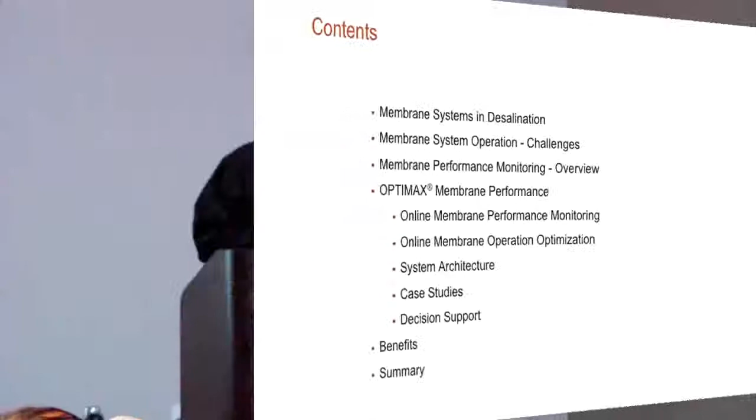The main purpose of this presentation is to talk about the major challenges that people face with ROs, which is the challenge of fouling. This reduces the productivity of the RO system in terms of throughput, increases energy consumption, and in some cases can even cause problems with product quality. So we're going to be reviewing a bit on that.

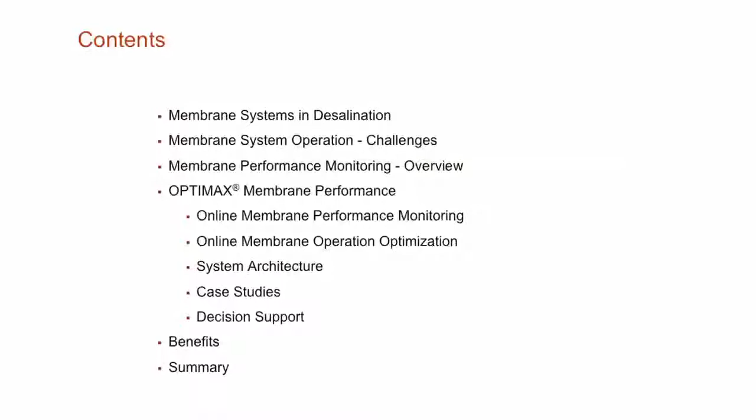Then I wanted to get into a technology developed by ABB called OPTIMAX, with the express purpose of enhancing membrane performance in an RO system, and also helping to reduce or conserve energy, since that's a very important part of RO operation. We'll talk a little bit about the system architecture, a couple case studies, and then get into the benefits and summary in RO plants.

We will be talking today about, within an RO plant, the different divisions of RO units, RO trains, and finally the pressure vessels and the actual membranes that are inside the pressure vessels. A little bit will also be said about pretreatment.

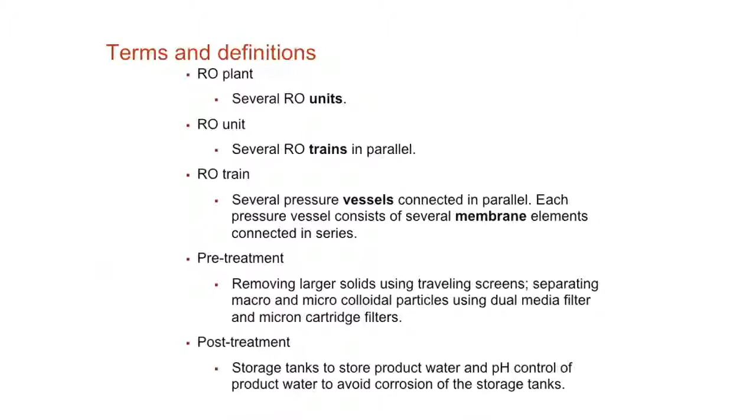Depending upon the source of the feed water to the RO system, this will have a great effect on what the pretreatment requirements are relative to things like suspended solids, organic removal, colloidal solids, and things of that nature. I'm not going to get into that a whole lot - I just wanted to recognize that most RO systems will have some form of pretreatment, and it can vary across the whole range.

Post-treatment - we're usually talking about this if it's for a drinking water supply that's going to be transmitted a great distance, like from an ocean inland many miles or kilometers. There's going to be some sort of storage devices right at the desalination system, then pumping stations, and there could be intermediate storage in between. You also need adjustments on pH, usually to make sure it's not aggressive on the materials of construction of the piping system, and it may be necessary to have some residual disinfection.

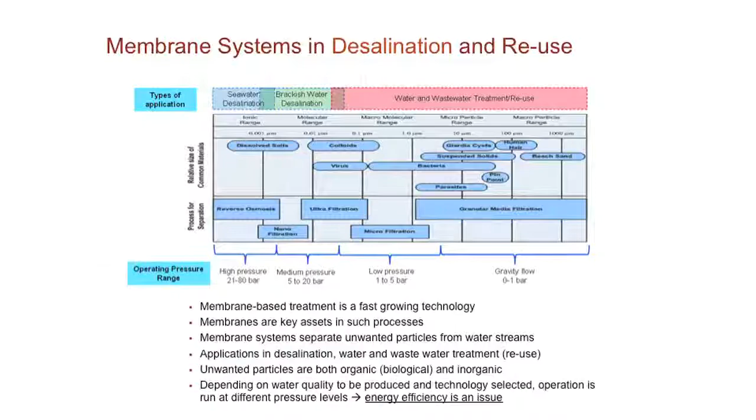RO, as you're all quite familiar with, ranges in the high pressure range as far as comparison to other types of membrane systems shown here. It also is in the range with the smallest allowed transfer size as far as molecular size. Many of these other membrane types are based on taking out suspended solids. By the time we get to nano and reverse osmosis, we're talking about taking out molecular-sized contaminants, particularly, in the case of desalination of seawater, predominantly sodium chloride.

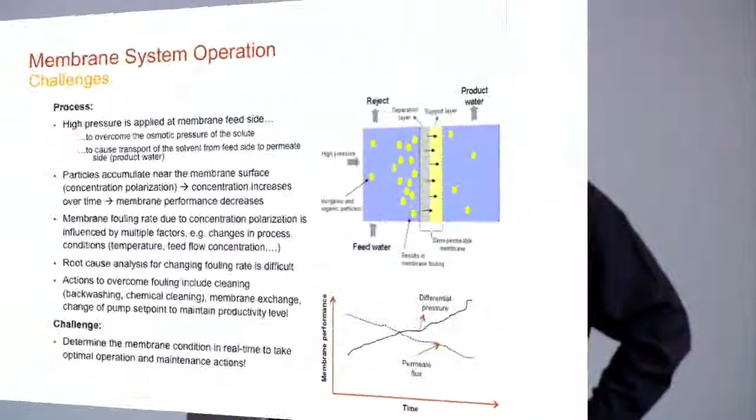To get into fouling - I realize this would be second nature to you, but I wanted to emphasize that fouling is created, for the most part, by the fact that we have a concentration, a localized concentration right here in a typical RO membrane. What we're depicting is an RO membrane in kind of a flat plate type arrangement, even though most of them are spiral wound nowadays.

Basically what we're identifying here is where the feed water comes in under high pressure. We have the semi-permeable membrane that will allow the water to pass through, while the larger molecules of dissolved salts and gases remain behind. We'd better not have any suspended solids at that point, or we'll be plugging up the RO regularly. The water passes through, and the concentration of salts and other things remains on this surface - that's where fouling occurs, as we get a localized concentration in the system.

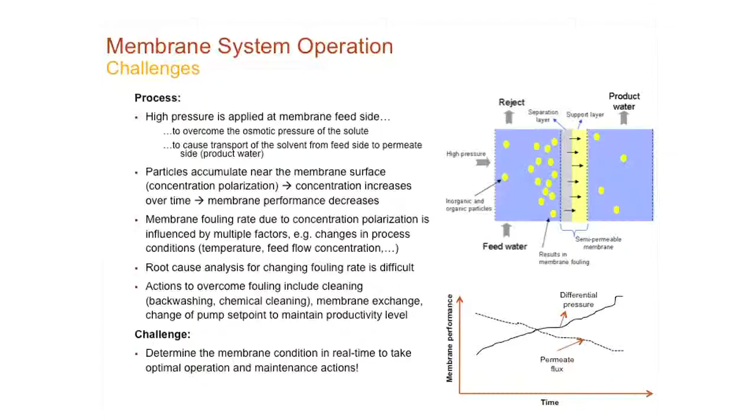With fouling, we have a couple different effects. One is that over time, our differential pressure between feed pressure and permeate or product water pressure has to increase in order to maintain the same amount of product production, or conversely, we'll see a decline in the permeate or product water production. Both of those are negatives, things we wanted to avoid because they overall cost us money in the operation of the RO system.

One phenomenon that we've noted, and this is not just ABB but the whole industry that uses it, is that fouling can actually occur in stepwise formations. This may be due to the fact that all of a sudden a bigger glob of stuff shows up at that localized concentration site, and as you can see, it can actually then sometimes drop off because it might flush itself out naturally, or through cleaning. Whereas the fouling thickness is more of a gradual upward lineal type approach.

Now, as far as restoring the membrane's performance, that's been done for many years, and there's been a lot of input made on that from the manufacturers of the membranes themselves, who are constantly trying to make improvements to ensure optimum performance. RO has really come a long way in the last 10, 20 years and has replaced a lot of other types of technologies, particularly thermal technologies in desalination.

The rule of thumb you'll get from OEMs of membrane systems is that they'll indicate how frequently the RO membrane should be cleaned by back flushing it, and you can do that a number of times. That's less aggressive than trying to do a chemical clean, and they'll give you rules of thumb for chemical clean too. A more scientific approach is to take a look at the ASTM standard on it, which pulls in more science relative to some of the conditions of the membrane and the water.

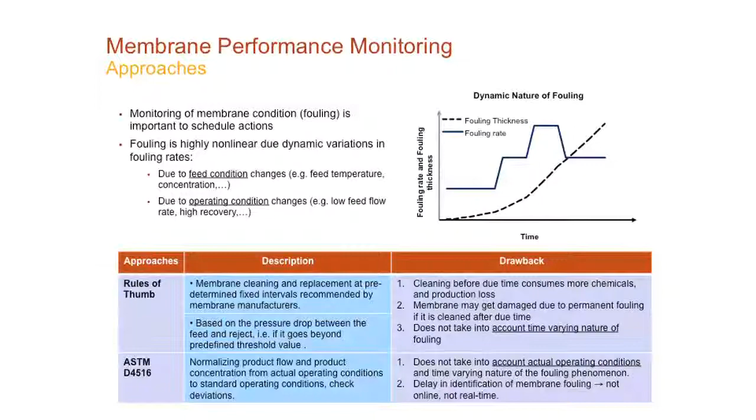So the system we're going to talk about today has a more dynamic review on it. It isn't instantaneous, but more on an hourly basis, or after an hour or two. Compared to these rules of thumb, which are basically just taking a look at how the production is doing over days, weeks, months, and eventually saying, okay, our membrane manufacturer recommends we ought to do a backflush on it, we better do a backflush on it.

I've already mentioned how to restore the membrane. One of the approaches is flushing, where we're basically backflushing the membrane. I should have mentioned at the very beginning, in any RO system it's standard practice to always have one more train than is needed. If you want 5 trains to handle the production that's necessary, you would actually install 6, so that when we take one out of service, we've still got the others to give us full capacity.

So with flushing, we are going to take the train out of service and backflush it, and that cleans out a certain amount of the fouling. I'll show you a chart in just a moment as to how well that can restore it.

Chemical cleaning, our definition of that is that you're going to be running a cleaning solution through — what we call clean in place — where a cleaning solution is run through the membranes and helps dissolve some of the localized fouling. If it's some of the dissolved salts that have maybe crystallized out there, it'll dissolve the ones that are still soluble and then flush them out, giving a better restoration than flushing.

Partial replacement refers to times when it's determined that one pressure vessel out of a whole array of RO pressure vessels is the one that's really producing bad water all the time, actually creating problems with the product quality. It's possible you have to take the whole train out to get to it, but it's also possible to just replace all of the membrane cartridges in that one pressure vessel and significantly restore the product quality.

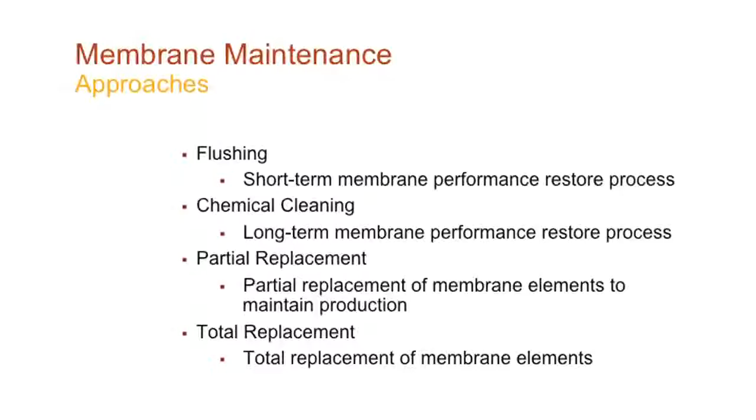Total replacement is going to have to occur on any RO system eventually. I've asked a lot of the RO manufacturers that make the membranes what sort of life expectancy we might have. Some of them do give guarantees, but those guarantees tend to be on the conservative side because they don't want to be paying a lot of money out of pocket, and they're not operating the system, so they don't have control over it. Some will have guarantees of 2 to 3 years, but typical life expectancy on spiral wound RO membranes is between 3 and 6 years, and it has a lot to do with how they're operated, what's going through it, and how frequently the cleaning is done.

Within an RO plant, we have different levels: RO units, and units are made up of trains. Trains are made up of individual modules that have the membrane stacked inside of them, and those are pressure modules, pressure vessels. The OPTIMAX program basically has two components to it.

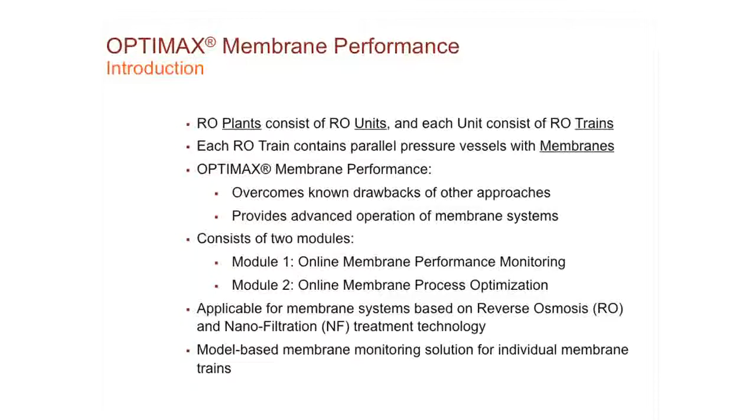One is a monitoring approach, and then it takes the data from that monitoring, runs it through some algorithms, and presents optimization recommendations. It doesn't actually physically have control over your RO system to make changes, but it puts itself on a dashboard for the operator to look at and say, okay, this is what it's really telling me. Beyond the rule of thumb that I had to do a backwash every 3 months, this thing's telling me I could wait another month or two because the condition is not that bad. So that's what we'll be talking about today.

There are a couple key points relative to performance monitoring that I've tried to underline. One is that this software will be available to work on different membrane configurations. It's not just one individual manufacturer or one specific type of membrane configuration, which I think is important because there's a very broad field of RO membranes. There's no additional sensors needed—we're basically taking data off of the assumption that the RO system is fairly well instrumented to begin with. So there's not a lot of hardware investment.

The other items I wanted to identify on the benefit side are the ability to identify the due date for the next membrane cleaning and backwash—I think those are really key features, because that should help extend the life of the membrane and reduce the amount of operation and maintenance costs for the people in your facility. Further, information comes out of the algorithms that helps tune the model to try to optimize and get the membrane operating at its peak performance.

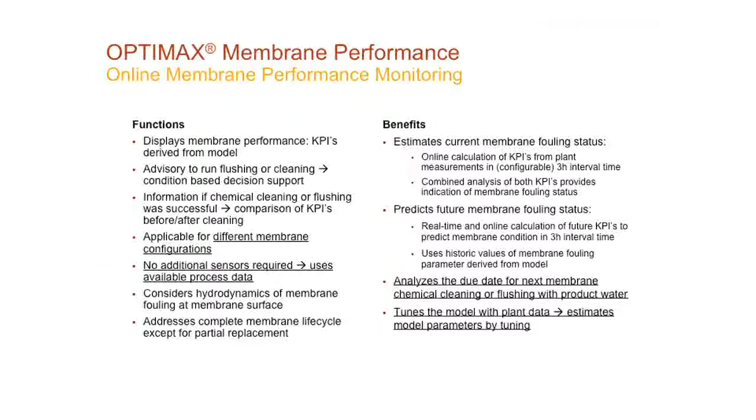One thing I should mention—the question might be, well, would you just go sit in a closet someplace and do a whole bunch of calculations and come up with this information? The answer is no. We've got very highly skilled engineers who did the calculations and then took it to pilot units initially to determine whether their calculations were valid, made some modifications, and then had the opportunity to beta test it on full-size operating customer units. One great thing is on a system that has multiple units, you can pick a couple of the trains and operate on those without affecting the whole system or having to take the whole system out of operation.

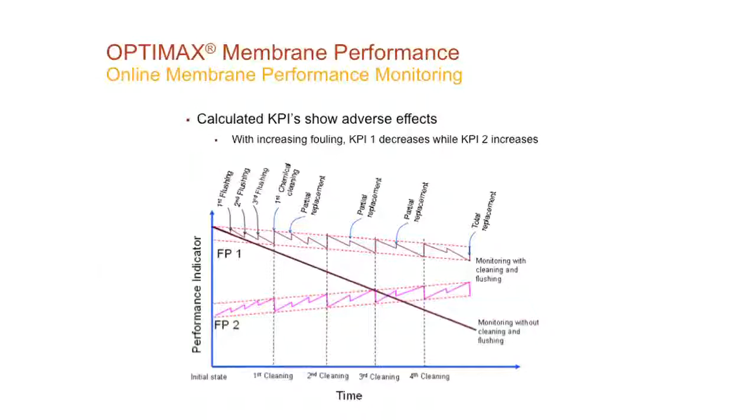Now, if we add cleaning and backwashing—first off we're going to do the backwashing, the flushing—because it's less intrusive, less aggressive, we're able to restore from this point back up to this point on each one of these, some of the performance of the membrane. But as you can see, the performance doesn't go straight across anymore, it doesn't maintain like it was new right out of the package. There will be some degradation, and that's normal too. But look at the difference between the line up here and this line down here. So it's really important to know that cleaning and flushing on a regular basis are very, very important.

Now, another KPI could be the energy consumption, represented by this line. As the membrane degrades some, the energy is going to go up a little bit. Then you flush it, and it performs better, comes back down a little ways, and so forth. But the overall trend is going to be up. What we're trying to do with our program is reduce these slopes so that the overall downtrend is not quite as steep, and the overall uptrend on something like energy is not quite as steep. We've been able to prove that OPTIMAX can do that.

This is typical of some of the dashboards. There's all sorts of different dashboards that can be presented for the customer depending upon what their specific requests are.

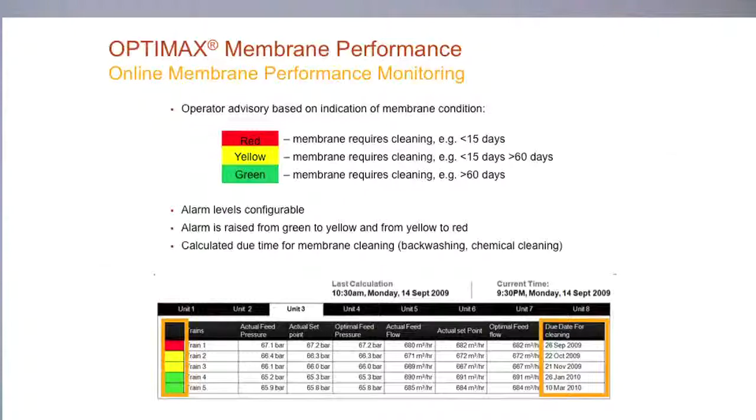In ROs, with this program, we can come down and real quickly see that we've got one train here that's going to be requiring some cleaning, and this is approximately the due date we ought to be looking at, plus or minus a day or two. But by rule of thumb, it may have told us to clean two months before this time—we would have been really wasting some capacity at that point. And under other rules of thumb, we might have missed this cleaning period based on the actual performance of the RO system. If you miss it significantly, it can get to the point where you can't restore it adequately at all, and then it has to be a membrane replacement, which adds to the cost.

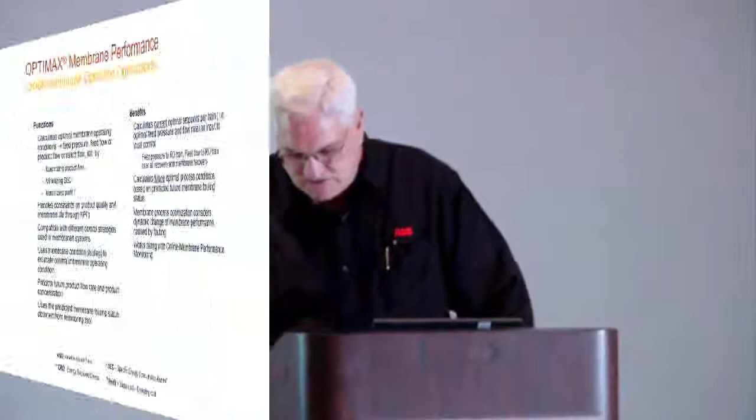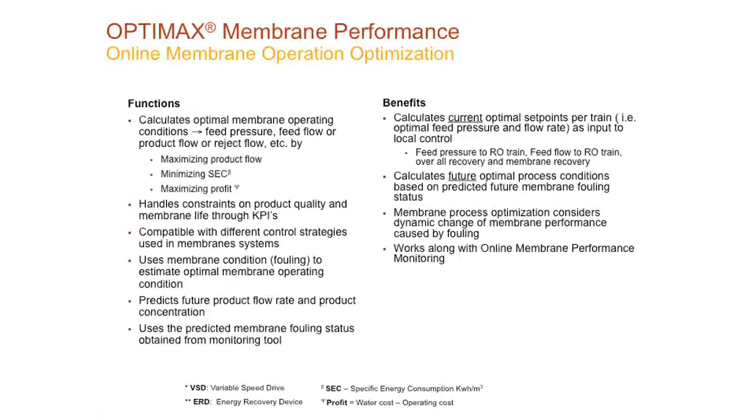The key thing here I wanted to bring your attention to is that by optimizing the operation, we're actually seeing maximization of product flow, which is really the whole purpose of the RO. We're trying to produce a product that can either go to your industrial facility or to a drinking water supply or whatever. We want to minimize the SEC—specific energy consumption—and we feel that if we manage those two things, it should maximize the profit. If you're an industrial client, that's reducing your costs, which means your profit's been maximized. If you're a municipality, it reduces your costs, meaning overall you're serving your community better, and you won't have to raise the rates as much in the future.

As we said earlier, a standard RO train is going to have a fair amount of instrumentation on it—pressure, temperatures, flow rates, and that sort of thing, and also concentration like conductivity meters on some of the key streams that we want to know about.

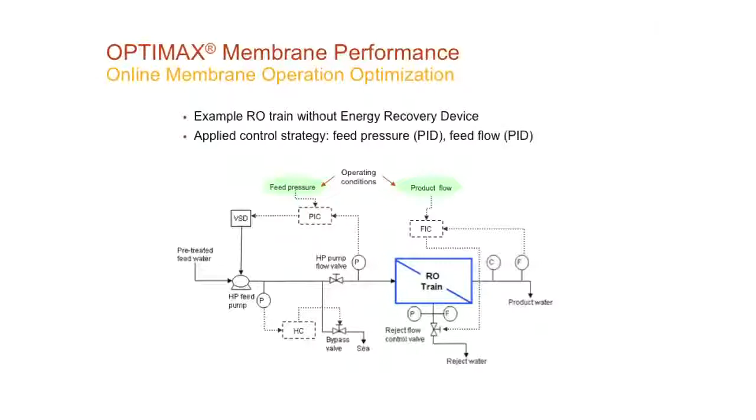With the OPTIMAX system, effectively what we're doing is gathering a lot of that data electronically, and running it through the program and the algorithms based on that membrane and our past experience on other projects. That's where we come up with the predictiveness of how well a system is operating right now, whether any of the set points ought to be changed on the pressure or the flow rate—things we can adjust. We can't adjust the concentration coming in, that's given. But on the things we can adjust, the program will be able to advise on that.

And then also the predictive nature of the future for when things need to be cleaned, when things might have to be backflushed, when things might have to be replaced.

Now, this particular one is a little bit different configuration in that we've got a Pelton wheel on it, which is a turbine that the reject water will flow through. The reject water comes out at an elevated pressure still, though not nearly as high as the feed water going in.

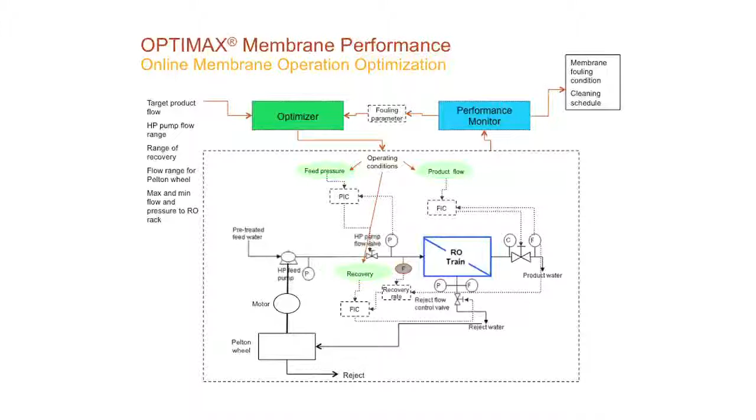But it's got energy in it, and so there are ways to be able to run it through a turbine. This is a very simple approach to do it, and then that adds some energy that can go into effectively a motor that will supplement the high pressure feed, because this is the single biggest energy consumer on the RO system.

Again, taking information that's already out there from the instrumentation in the system, we can pull all these different things together - the recovery rates, feed pressure and flow - and bring it up here and feed it into our performance monitor first, which then in turn can feed information over to the optimizer, which can help tell the system or the operator if any of the set points ought to be changed in any way. Additionally, that performance monitor is doing the evaluation on the cleaning and replacement schedule.

Now this is a little bit more sophisticated. Many of you are probably familiar with energy recovery devices. They've come on the scene, I'd say, really successfully in the last 10 to 12 years, and they're really important for larger RO systems. Effectively what they're doing is a sophisticated approach to taking the energy out of the reject stream and basically energizing a portion of the incoming stream.

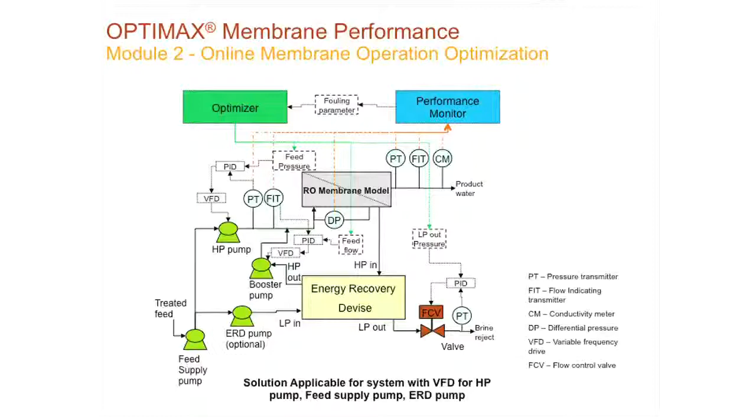You can see the feed supply comes in and splits between going through this pump this way - still a low pressure, let's say it's seawater - and then the rest of the seawater goes up here and through the high pressure. Effectively what this is doing is cutting down on the total energy consumption of the high pressure. That's very important because relative to any of these other pumps, the high pressure is undoubtedly the largest energy consumption on this chart.

So on this one, we're not involved with the energy devices. There are a number of companies that design and supply these on a regular basis, and they're very good for this particular membrane industry, for the RO systems. But again, we can work with that to take some key information out of here, like feed flow and the pressures, and run them up into our performance monitor.

And you're probably wondering, well, what are the calculations that go from taking all this data through the performance monitor? Well, this is kind of like the Coke formula - if they told me, they'd have to shoot me tomorrow, so I don't even know how it works. It's some of our more esteemed colleagues over in Germany and other parts of Europe that have come up with this. But again, the whole idea is that we can identify the optimized set points for the entire system and also the cleaning and maintenance.

As far as the system architecture, one of the things I wanted to mention is I start with this one here because it says DCS system by ABB or third party. There could be an existing RO system at a plant, and let's say this one isn't even there - it's just an existing RO system somebody wants to upgrade. Our technology is compatible with talking to other people's DCS. It doesn't have to go in and replace a DCS with an ABB DCS in order for this to work.

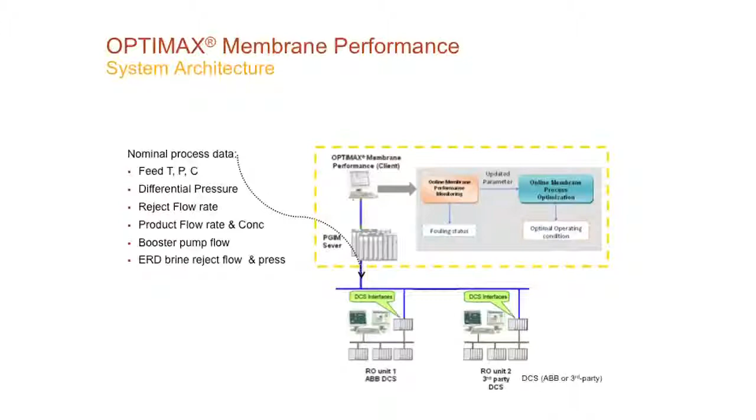Effectively, the data would be coming out of their control system, and we can pull that up, run it through our program and our algorithms, and then give the output to the customer in a format that's very easy to use and very easy to act upon.

Now, if somebody was expanding their RO system, of course, we'd like to talk to them about the opportunity to supply them an ABB DCS and still feed it. It doesn't matter if we had 3 or 4 other third parties here - we can integrate all of them into a single system. There are basic parameters we're looking for, and from those parameters we make the calculations and come up with the best recommendations.

The additional features you'll find in this OPTIMAX system are information management. It'll collect all of the data. This is one thing that we find kind of frustrating sometimes.

You go to an RO site, somebody's got a rather large plant, multi-million-dollar investment, and you ask them, what is different about your RO right now today than it was over the last month, the last 6 months - a lot of people don't have any data whatsoever. At one point they saw it all out there on their equipment. They even maybe had it come into a central HMI and saw it as a data printout, but there wasn't any sort of collection, any sort of analysis of that and reduction of that data down to meaningful information.

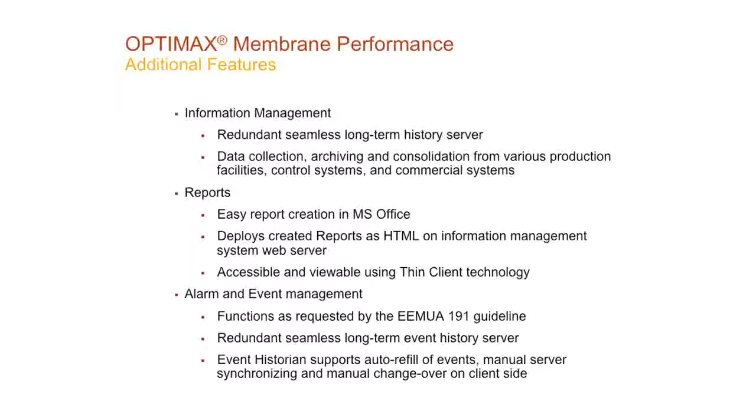Also, from a standpoint of alarms and event management, we're fully compliant with whatever the locale requires. Being a global company, we have to adapt to many different countries and their requirements, and to the specific customer too. If we're doing something in the oil and gas industry, their requirements are significantly different than what we'd find in a power plant or a water municipality.

Case studies — I'm just going to go through some of these briefly here, and we can discuss them later if you have more questions.

This is one where I indicated we were able to take 2 trains out of a total 10-train unit and do an evaluation on it. This particular one did not have any energy recovery device, which simplifies the activity a bit more, and it was a fairly sized train that we were working with.

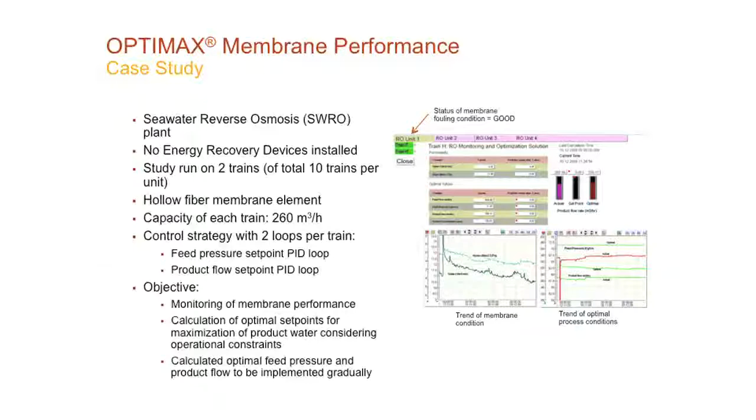This is the sort of data you get out of the evaluation. The objective was to monitor membrane performance, do calculations on optimal set points, and then calculate what the feed pressure and product flow ought to be to optimize it.

These charts are a bit small, but effectively what you can see is that on things starting to degrade, after we got the OPTIMAX system running, we were able to maintain it at that level and pretty much keep it from getting any worse.

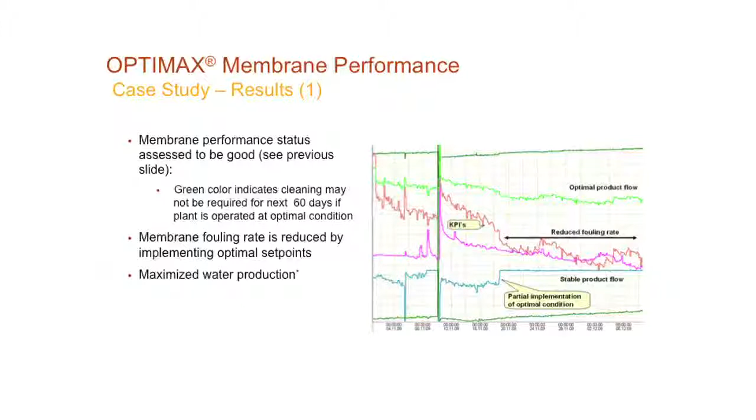This is a bigger chart where you can see the impact. On this side of the line, things were before OPTIMAX kicked in, and we had these different KPIs, with these two declining at a fairly sharp rate. After OPTIMAX, we were able to restore it back up to a higher level. It still had a decline, but eventually we got it to a point where it essentially flat-lined on the fouling, which is important so no further degradation was being made.

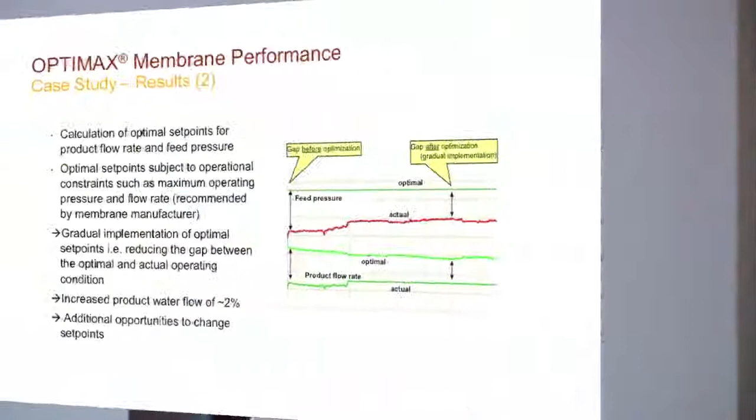Similarly, on the product water, we were actually able to raise that up a little bit as far as quantity, and then keep it at a steady state.

On this particular case study, we had fairly wide gaps between the optimal condition and the actual condition, in both product flow and feed pressure. After OPTIMAX was put in, it takes a little while for the effect to take place, but it did bring both cases up and minimize those differentials, which is the positive effect we want to see.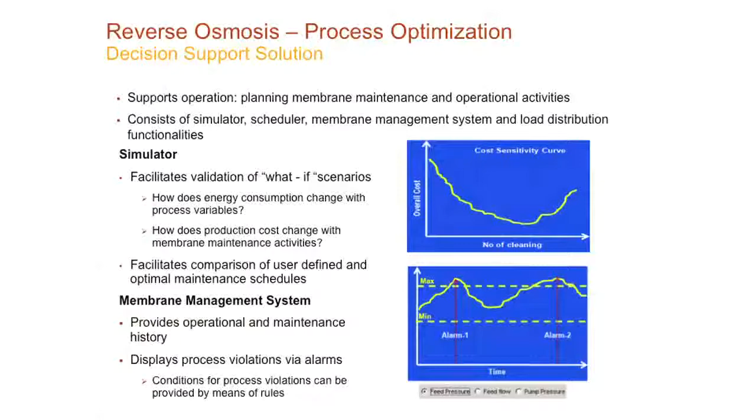We can take the system after we've loaded it fully in, know all of its normal characteristics and current characteristics, and be able to simulate by changing some of the parameters—pressure, concentration, and things of that nature—in case the customer thinks they're going to be seeing something like that in the future, and be able to predict what the performance of the system is going to be.

The membrane management, I think we've discussed enough already as far as lengthening the life of the membrane by proper cleanings and flushings and how we set the set points on many of the parameters. As far as the scheduler, this is the program that would identify when those cleanings and membrane backflushes should be taking place.

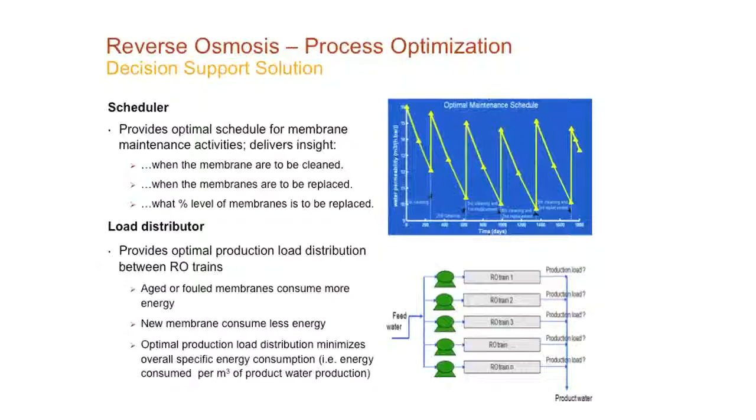As far as a load distributor, I attributed a little bit to this earlier where I said, let's take for instance one of these trains has had some sort of a membrane failure. It could be mechanically within the membrane, or something got through that train and clogged it up and it's not restorable. We'll be able to detect that particular membrane or train as being the problematic one, and since we have n number of trains—say we need 4 of them in service and we've got 5 total—we're able to isolate that and fix the problem. We could take it out of service and replace the offending membrane, or find out that all the membranes have got problems with it, and be able to get that one back up to a much higher performance.

But before we ever did that, we would be able to do load leveling on the whole system, be able to continue to get the product amount that we wanted at the product concentration and with a reasonable amount of energy consumption.

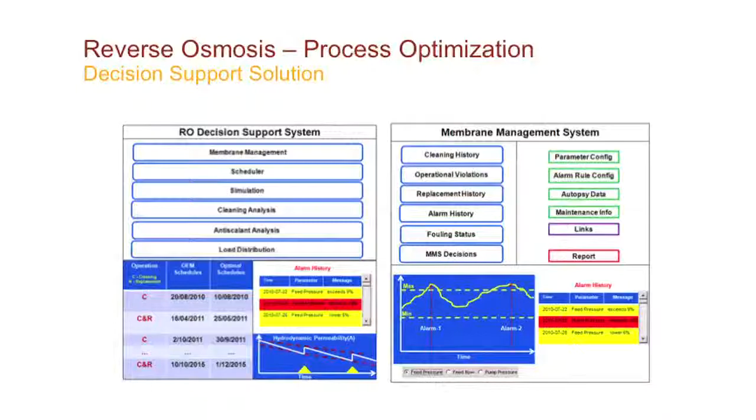Dashboards—this is what I wanted to show, as far as the dashboards that come up for the operators, these are some of the sorts of things they would see. It would have things for the overall RO, what we call the decision support system, which is what OPTIMAX really is, and another category called membrane management system. They can pick on any one of these different subject matters and pull up a custom screen for that.

It's very logical what they're going to be looking at, and the use of these different colors—yellow, red, green—to highlight when we've got serious problems that we need to take care of, or when the system's operating perfectly fine and it's time not to touch it.

So in summary on this particular technology, I wanted to say its main focus is to be able to overlay on existing RO systems that are already out there with minimum amount of investment in terms of capital. It's mostly software—we're taking information from existing instrumentation that's already on the RO system.

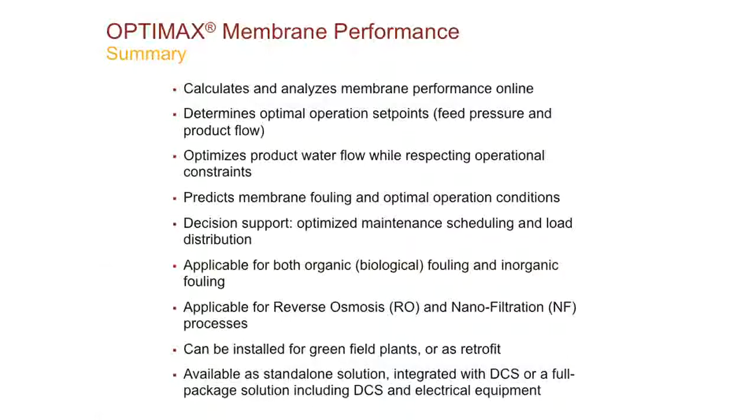Now if not everything was there, if it wasn't all instrumented, then of course we're prepared to work with the customer to instrument it properly. But we take the information and analyze it in algorithms that are based on true operating situations of many, many other systems, and then create a recommendation at a couple different critical levels—green, yellow, red—as to whether cleaning ought to be taking place on the membrane, backflushing ought to be considered, or membrane replacement.

And then also the other part of it is to be able to identify, besides the maintenance schedule and the predictive maintenance, the set points that are key to the operation of the RO system, to be able to optimize it in terms of energy consumption being as low as possible and actual product production being as high as possible, in terms of both product water quantity and product quality.

And as this chart shows, it can be implemented on both reverse osmosis and nanofiltration. Those tend to be the two membranes that are on the higher end pressure-wise, where things are a little bit more expensive than, say, some of the lower end ones like UF and microfiltration. And we've gone through the benefits.

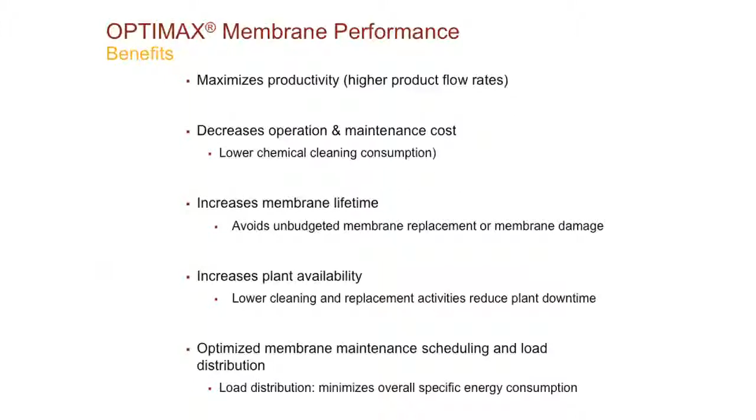Basically, isn't it all true that for all of us, whether it's industrial, for our companies, or for our families, it comes down to how do we make life better and how do we keep money in our pocket rather than spending it. That's really what this system and this technology comes down to—it makes life simpler for the operators of the RO system. It ensures higher productivity for their system, reliability, and reduces their costs by not getting into situations of premature wear or premature failure, and lets them make whatever product their objectives are. Thank you.